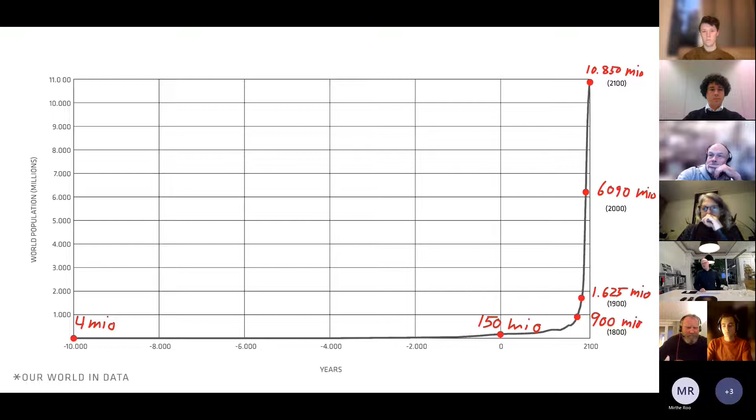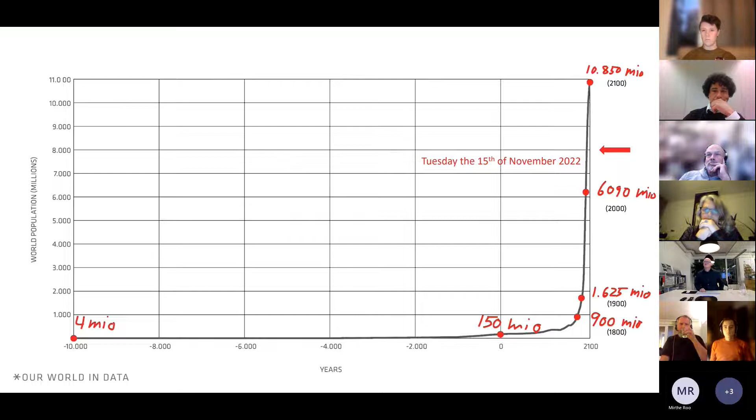And the reason for that is the human evolution that this first slide introduces. What is really shocking is this fact that just came up a couple of weeks ago, that Tuesday, the 15th of November, we exceeded 8 billion people on the planet. And it doesn't really look like this curve is going to incline less.

So we're basing our office and our approach on these conditions and the awareness that not everything looks like Denmark or the Netherlands, even though the two countries are some of the most cultivated countries on the globe, I think next to Bangladesh or something like that. But what is really mind-blowing is that over the next 40 years, we're going to more than double the amount of square meters that are already on the planet today. So to consider the consequences and effects that this situation generates is kind of mind-blowing to us.

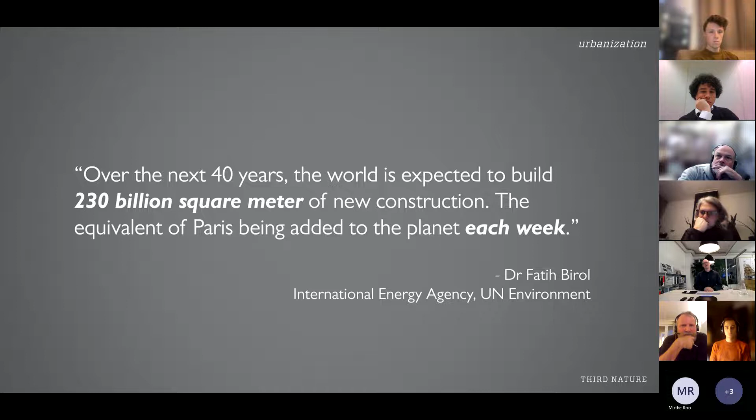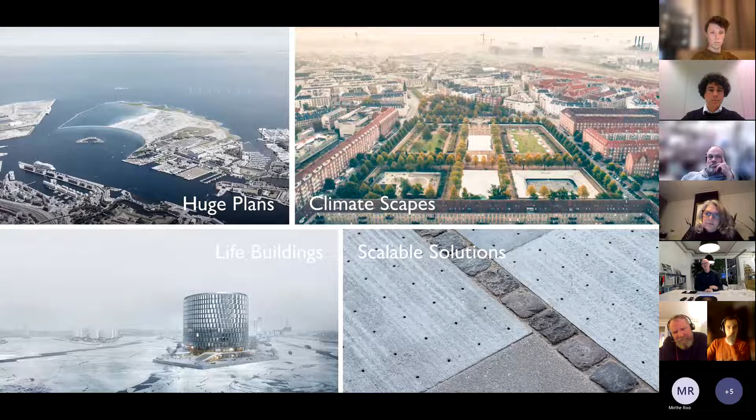So that is maybe a bit abstract, but that is what we worked with on different levels, going from huge plans to Climatescapes, the Enghaveparken that Hedwig just mentioned. We are also doing architecture, building quite a lot, actually. And then down to the smallest department, our scalable solutions, where this reference is a product we have developed over the past 5 years. I'll also introduce you to that. But let's jump right into the projects.

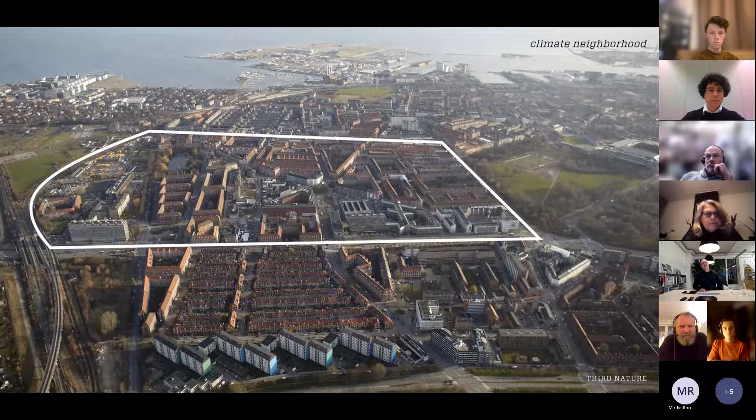The first project we ever did was a competition, part of the European planning competition called Europan. We chose this site just north of Copenhagen Center because we could bike to it and investigate it. Quite nice, of course. What was not so nice was that this 100-acre site, just after we handed in, was hit by a super rain event, a monster rain, a cloudburst. It's estimated to be equivalent to a 1,000-year rain event, causing damages in Copenhagen alone of more than 1 billion euros within a 2-hour rain incident.

This picture was actually taken from that site, and luckily we developed our proposal with a very nature-based approach. So we had quite a good gut feeling that we had a decent chance of winning, and luckily we did, and got the commission by the city of Copenhagen to develop the plan further.

And when we started working on it, we sort of came to the awareness that even though the streets and the heights of the buildings and the widths of the streets were more or less equivalent to any other neighborhood in Copenhagen, we were puzzled why there was a need to start painting white stripes all over the place to know whether you were supposed to stop or turn left or right. So kind of in a naive way, we started questioning, hey, could there be an abundance of pavement or closed asphalt here that we didn't need?

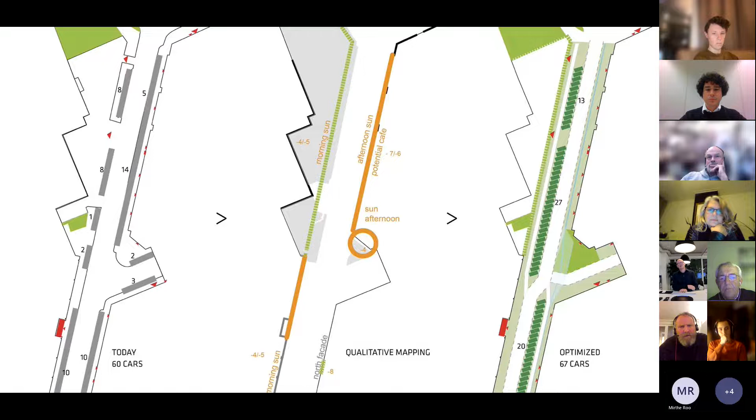So when we scaled it up on a 100-acre site, like this diagrammatic plan, as you see, there was more than 270,000 square meters of asphalt, and we could give 50,000 square meters back to the people living there, or the housing unions that are living there, as a shared outdoor space.

So all the southern or southwestern or western orientated edge zones outside the building plot, we could give back as green permeable areas that could transform the area from this grayish neighborhood into a much more lush green district that we then called the climate neighborhood. And that is what everyone calls it today. And it has been adopted as a pilot project to initiate more projects like this all over the city.

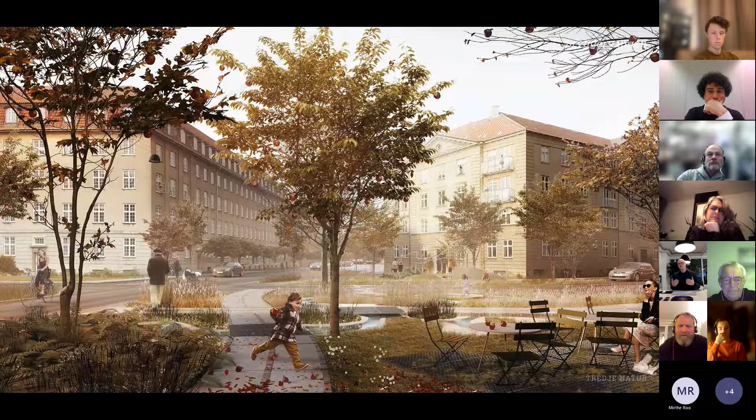So very often when we as architects are met with our illustrations and visualizations, they always say that that is not possible. But here we actually knew exactly what was going on also below ground. And I think in most European cities, we have tons of utility companies with the sewer system, the heating system, all the fiber cabling to lay out. At least in Copenhagen, we have, I think, 22 different utility companies.

And that's where the Tower of Babel comes in again, because they don't communicate. They don't share software. They don't share timing, meaning every time the utility company for the heating digs up the street and fits in new piping, 6 months later, another utility company is coming in, digging up the same pavement, the same tiles, and reestablishing everything. So it's a super expensive and kind of stupid way to do it.

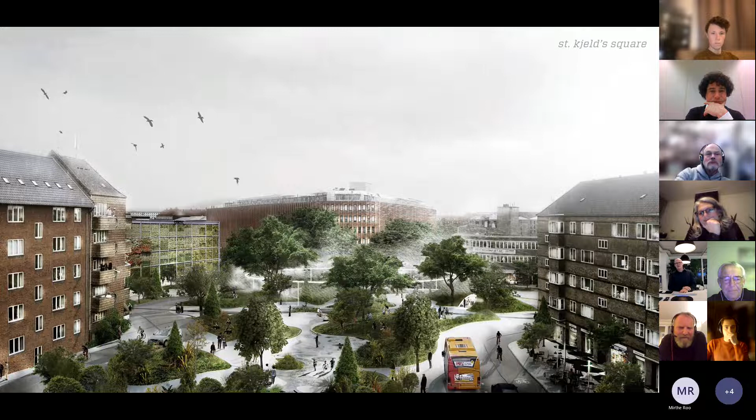So it was strong starting out with the why here again, and then creating the solution in the architecture itself. Again, turning an island of stupidity into an island of good behavior, into this kind of green scenario. And this is how the area looks today.

After we did the planning, the municipality developed three of the squares and the streets, and this square alone was optimized by more than 50% of the asphalt, turning that into green infrastructure. So again, a completely new mindset, a completely new view. You can actually hear birds sing. There are tons of different species.

It is climate protected, and this district is going from something that you took a shortcut through when you had to go to IKEA. Now you actually use it as a destination. Cafes are opening. The real estate prices are getting higher, also compared to the remaining parts of Copenhagen, like it's getting higher by 6 to 8% on a yearly basis. So kind of a success.

So we were saying to the city, like, listen, guys, if we could make this happen in this representative neighborhood of Copenhagen of a scale of 100 acres, what stops us in implementing that on a city scale in Copenhagen? So imagine if we could project the 20% cost saving on the servicing of our gray infrastructure and putting that into investing in the green infrastructure, making the city much more permeable, lowering the urban heat island effect, etc.

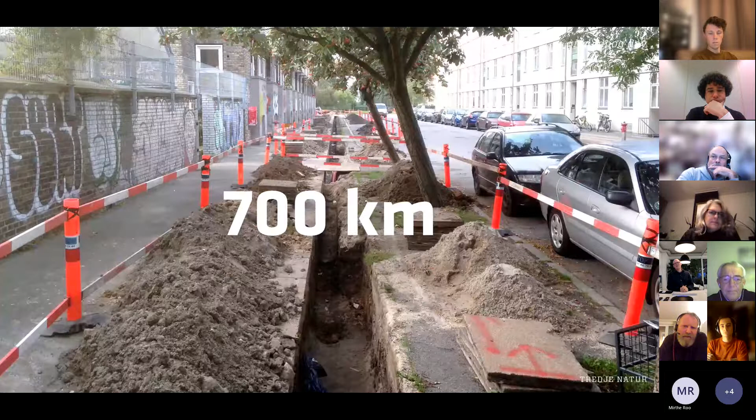The next project is actually a product called the Climate Tile, because we found out with all these optimization potentials of the gray infrastructure that there was this situation, as mentioned, that we have more than 700 kilometers of sidewalks in Copenhagen. They all consist of these gray tiles that you see in the lower right corner.

And this is the situation that you, as a commuter or a car owner, pedaling around, commuting, trying to find a parking spot, being frustrated because half of the city is looking like this all the time. And it also represents a lot of carbon emissions, pollution, etc. I guess you know all these issues. So we're saying, could we do that a bit smarter? Could we reinvent that tile that hasn't been innovated in the past 50 years?

So the ambition was to see whether we could take something that is kind of linear, our paving systems and our sewer system, and redirect them into a circular kind of thinking. If we could retain water falling on our roofs, on our sidewalks, that is considered clean enough to reuse, could we direct that into the planters, watering the trees?

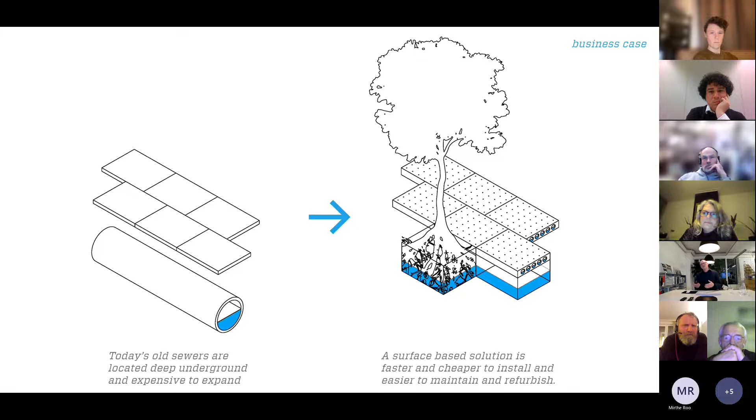Because I guess Copenhagen is not the only city that has a political ambition of planting hundreds or thousands of trees, but no one knows where to put them because we have this technological Tower of Babel below ground. So that was the ambition, and you see the conventional tile in the bottom and the new tiles, the climate tiles, adjacent to it. So the idea was to come up with a system that clicks directly into this scalable tile solution that we have all over the city.

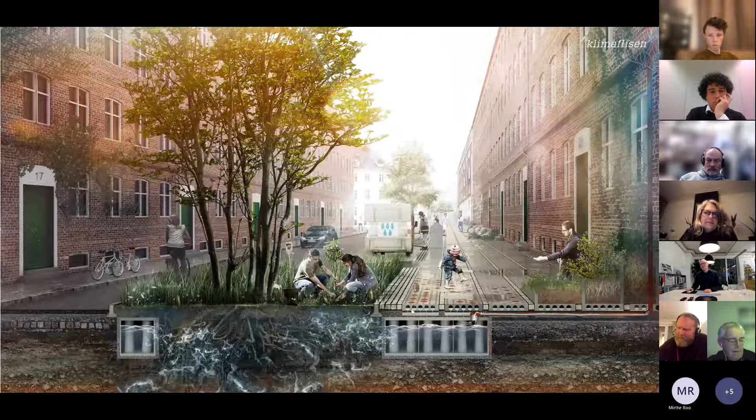But due to the fact that it has 42 holes on the top and a 5-chamber canal system in the middle of it, we could retain water falling on our roofs and sidewalks and store it until the existing sewer system is ready to receive the enormous amounts of water falling on our cities again. We could also direct it into the new planters that we proposed. We could also filtrate the water falling from the street before it went into the sewer system.

So kind of smart, stupid solutions that were more or less inspired by the Romans with the aqueduct. Here we just created something that was also scalable, but imagine coming to Copenhagen and being able to walk on water. I think that at least is a narrative that most politicians can understand.

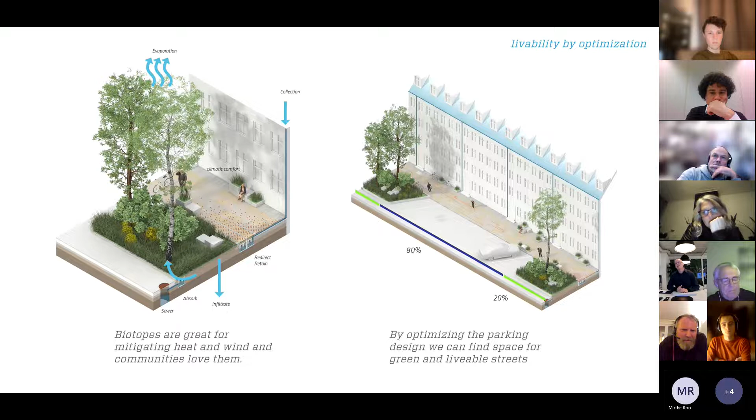The findings and the surpluses, the winnings of this project are, of course, that we can retain water, but it can also infiltrate, it can absorb, and it can also lower the urban heat island effect. We could also place trees and optimize the usage of the grey infrastructure, still fitting in a lot of cars and turning the streets as we know them into something that was much more inviting.

So the system actually comes in many different layers, spanning from a walkable sidewalk tile up to what we call a fat boy, being able to also provide solutions for streets, for bike lanes, etc. Again, it has to fit with the Danish standards.

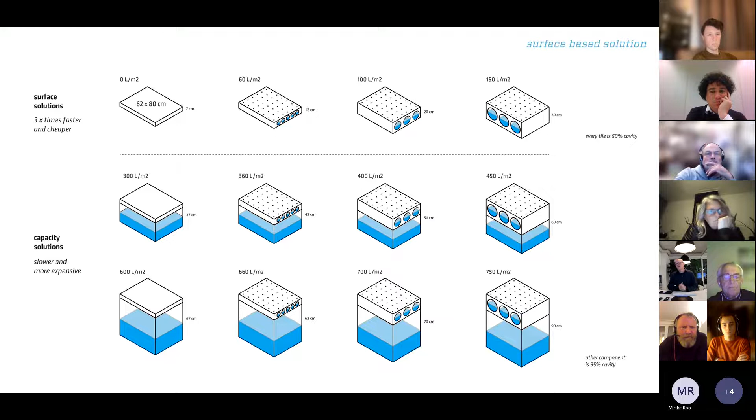We can dimension it in both lengths and widths and depths. So kind of a very modular, scalable solution. So for the remaining amount of money that we had in the project, we sort of said it's needed to test this out in the real world.

So we convinced this cafe and this housing block just outside the office that we could use them as a test. And this is how it used to look. And this is like half an hour before the last tree was planted and the last tile was put in place. And this was sort of the day after, and our collaborators from huge German cement producers came up to visit this test street.

But what actually catches my eye is that within a day, the street and the sidewalk turned from something that was just a walkway, a sidewalk, into an urban space. Suddenly, the area attracted a whole lot of different groups, and people started using it as a common space, as an urban space, where all the soft commuters, but also the cars, were sort of accepted because the nature-based solution functioned as this kind of a buffer in between.

And the nice side effect for us was that every time we visited the cafe, we got free coffee, because they more than doubled the income based on this urban space that was made sort of by mistake, more or less. So we have been monitoring the solution for the past 4 years.

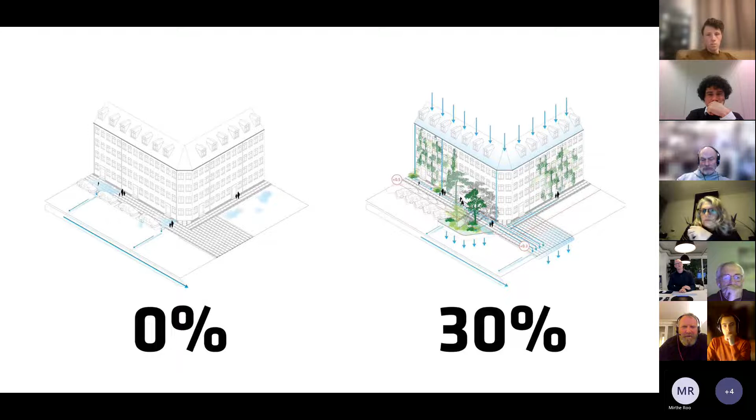So kind of a huge potential with a small product and a small solution. As you see, only 50 meters done, but we are sort of ready to take the concept to market. Now we're looking out for collaborators, other cities, ideally in Europe, who are also facing a lot of these flooding situations, not only Copenhagen, I know. So it is more or less ready.

And since there's a geographical limitation to when it makes sense to transport concrete products, ideally it's a system that we sort of license out. So local manufacturers, local producers can use it with the local concrete tile manufacturers in any given place. So hopefully going from 50 meters in Copenhagen to, I don't know what, in a city near you, hopefully.

So as said, this kind of approach led to other commissions for the city of Copenhagen. Actually, this was 7 commissions because there was a huge plan. After this rain event, the municipality initiated, I think, 300 projects over the coming years, for more than 2 billion euros. Our job was sort of trying to navigate within that, because there's a lot of knowledge, a lot of different disciplines that go into urban planning and climate resiliency. I think you all know that with the kind of topic we're discussing today.

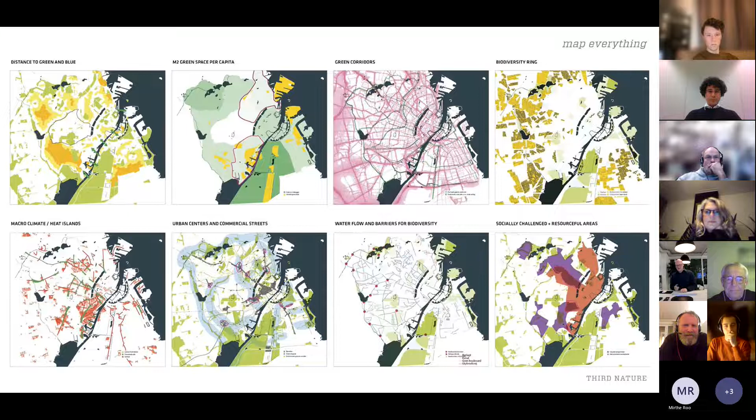So we looked into all these other parameters when it comes to urban planning and common sense. So what is the distance to green and blue? Where are the development zones? Where are the ghettos where you have earmarked a lot of money? Where are the heat island effects? And so I think 22 different parameters we put into this absurd Rorschach test of an urban map. And it looks like this hippie T-shirt from the 70s, I guess.

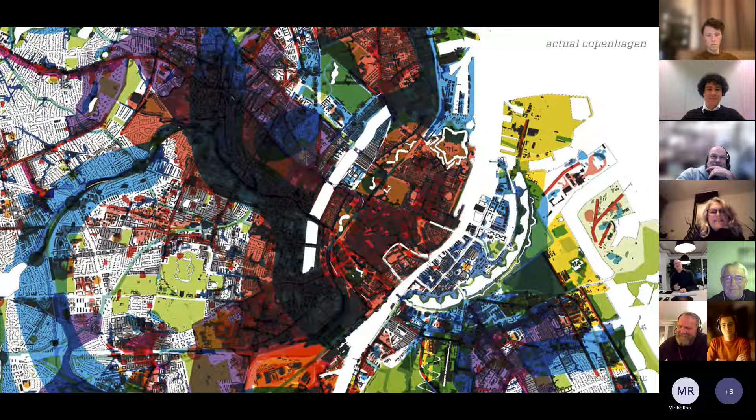But we sort of used it as a tool, because when we just pulled apart the 7 different districts, it was quite clear to see that there are different conditions here. Clearly in the inner city, the biggest challenge is the urban heat island effect, because we don't have the amount of green parks, etc., that can absorb the heat.

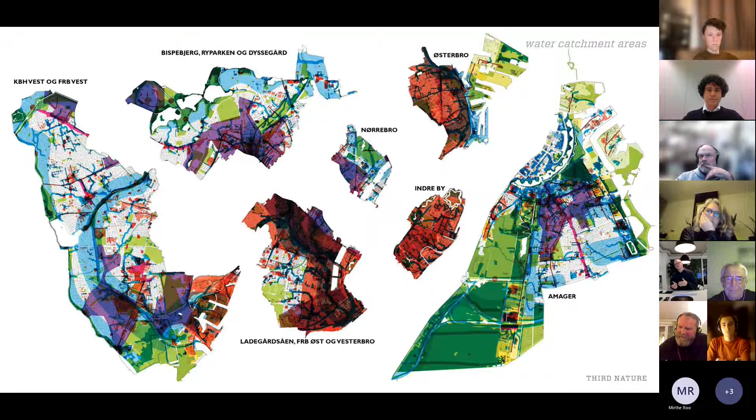So the best thing to spend your money on here is not the same thing that is smart to use on Nørrebro, where the office is, for instance. So on a very macro level, we recommended the city to use it as a guiding tool to actually direct the money in a smart way. So it's not one solution fits all. And then we came up with all these 7 different schemes for each neighborhood with clear recommendations.

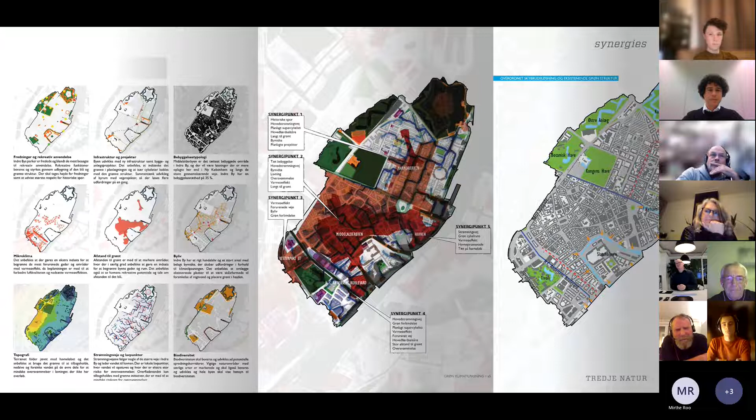What are the givens here? What is the parking norm? Where's the urban life? Where are the local flows, the blue spots? All these things with the topography. And then we created these recommendations of how to increase the amount of green based on that kind of knowledge. And then also with kind of basic solutions of how to create more connected green infrastructures.

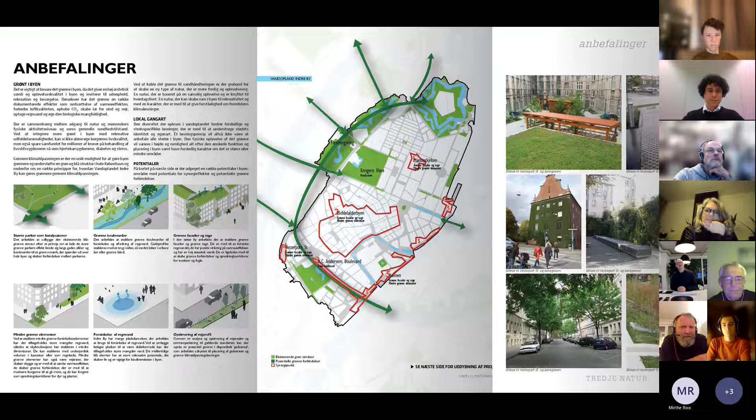Again, with reference to this quote, that we don't need islands of good behavior in a sea of stupidity. We need things that actually increase the biomass. We need things that can create synergies and connections of blue and green infrastructures. And the reason for doing that is also somehow in a curious way starting to question how can it be that we went from this

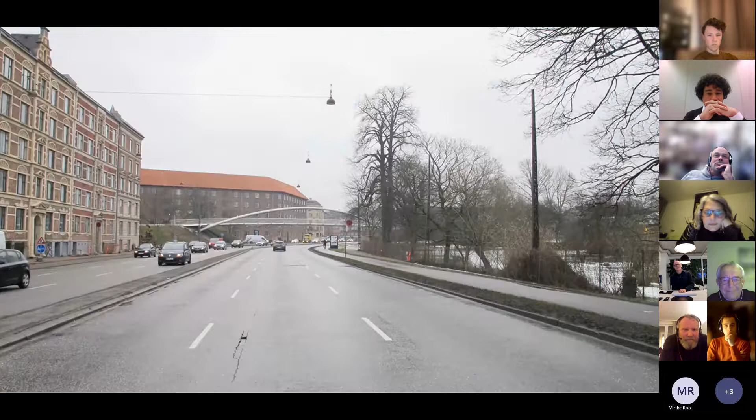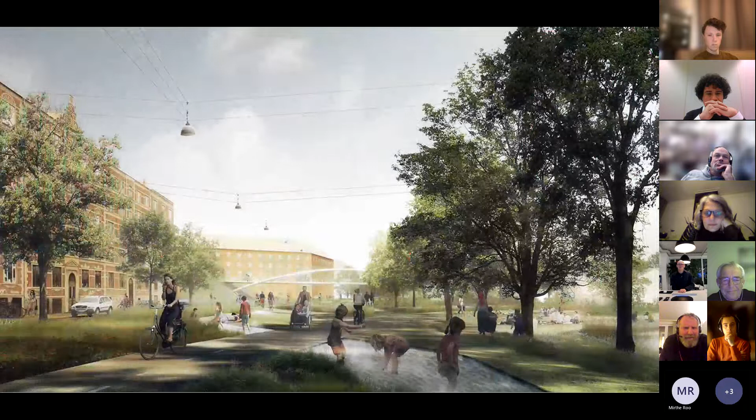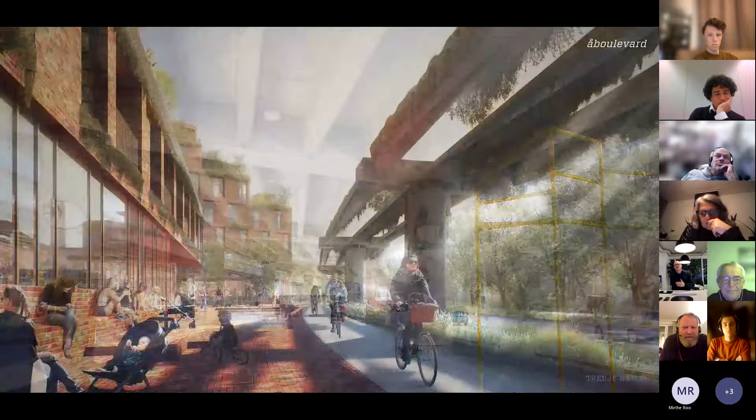So this is one of the main infrastructures in Copenhagen. So we created these kind of potential green visions that could show how the city would look if we actually could optimize the infrastructure, both above the ground, but also working with cut and cover solutions, climate adapted for heavy rain events. How can we look at this modernistic legacy that was initiated in the 70s? How could we turn that into the green line of Copenhagen, providing space for common housing, social housing, youth housing, etc. So as you see on many different levels, but hopefully you can also see some kind of thin red line in the narrative of how we approach our projects.

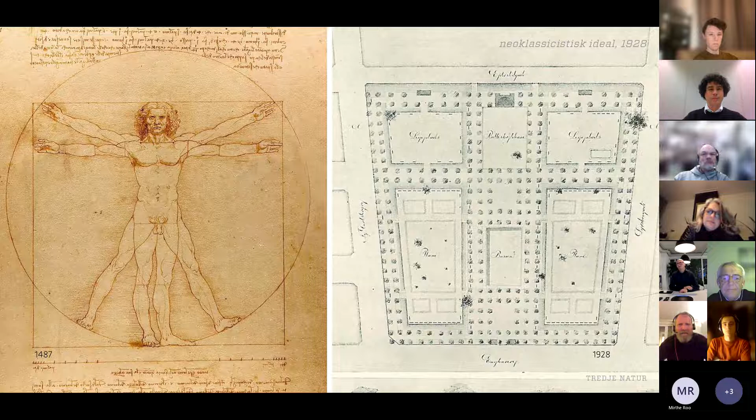And luckily that also led us to get invited and pre-qualified for a competition about this park, Enghaveparken, that is a wonderful place, or at least it was. Initially established back in 1928, based on this neoclassical layout with the Vitruvian man. Everything was related to the scale of the body, so kind of strict. The park was super popular, but also quite worn down, as you see from this overview.

But really an issue here was that the former brewery site of Carlsberg is just on the left side of this picture. And it was planned at a time where no one was even capable of spelling climate change. So all the water that is falling on this Carlsberg, the mountain, flows directly into the basements of this district. So the utility company of Copenhagen and the city came up with a given here that, yes, you have to renew the park, but you also have to fit in up to 24,000 cubic meters of rainwater in this park with a size of approximately 30,000 square meters.

So a substantial amount of water at a height that is, of course, giving some challenges to keeping the neoclassical layout. But we managed to come up with a solution, a three-step solution, as we call it, that works on a normal day, as you see on the left, where you have some water elements always visible, so the small puddles, the pools, and also a visible water element surrounding the park. On a 10-year rain event, we were then capable of retaining a substantial amount of water, as you see here, up to 10,000 cubic meters.

And retain it before the existing dimensioned utility or sewer system was ready to receive that amount of water. So again, the park functions as a reservoir and can hold back the water, minimizing the need to spend billions of euros on the infrastructure below ground that doesn't really bring any added value

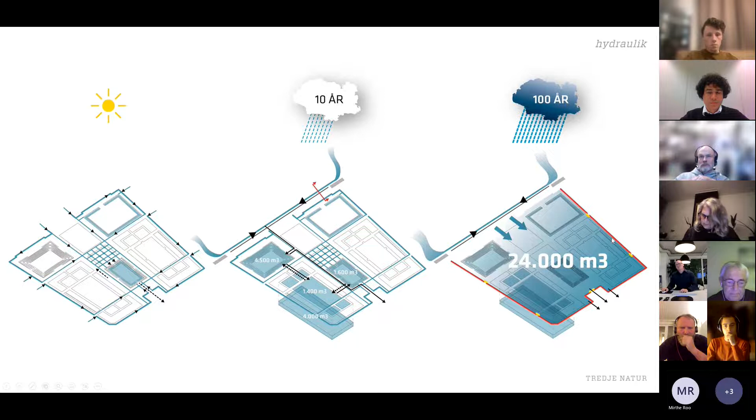to the city. And then on a monster rain event, a heavy rain event, the entire park can sort of be closed down by a surrounding dike, or the longest bench of Copenhagen, as we call it, an approximately 90 centimeter high dike or polder or bench that we can close down in these yellow marked entrances and then retain up to these 24,000 cubic meters of water.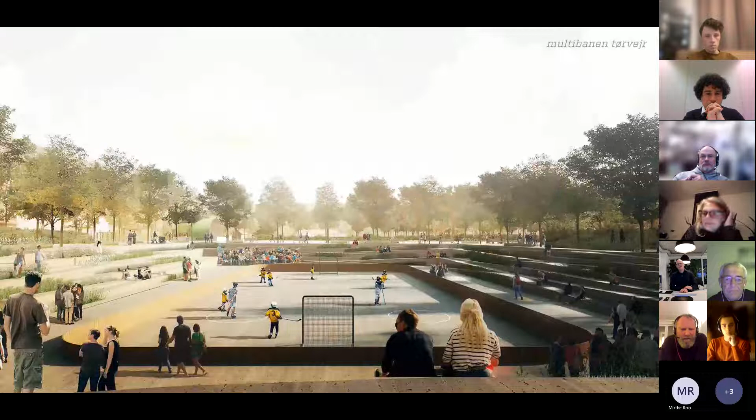So, of course, it doesn't rain that much in Copenhagen. It rains 180 days a year, so kind of a lot. But of course, the park has to work all the other days that it's not needed for these retaining principles. So it has all these elements. But jumping to one of these reservoirs, 99% of the time it works as a schoolyard, for the hockey club, for concerts, etc.

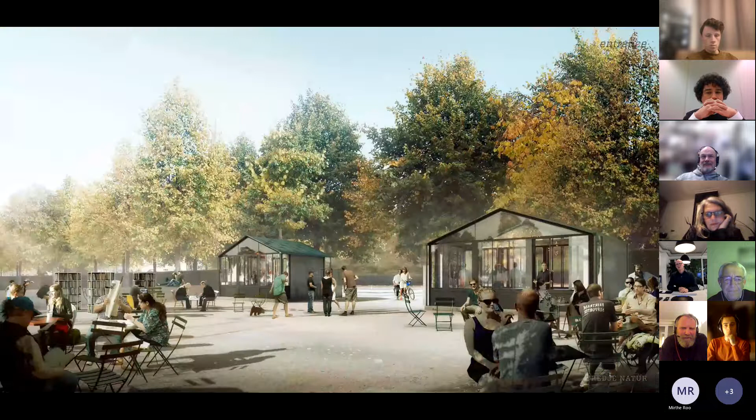And then when this 10-year rain event comes, the reservoir is being filled up, and you can retain the water until the sewer system is ready, and then it's slowly being emptied and cleaned, and 6 hours later, it's back to normal condition again. And on these super rain events, we can use the gates with the historical entrance buildings,

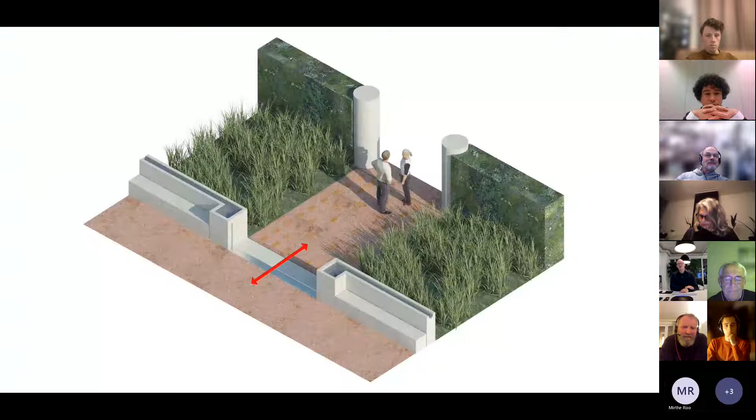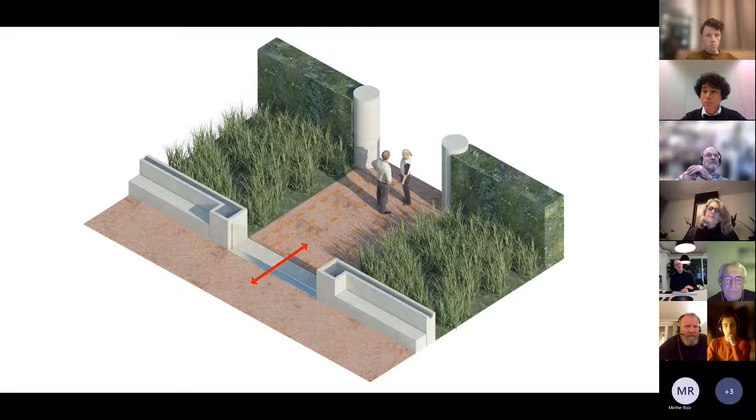and we sort of developed this idea of the gates where you see the benches here, and in a very low technical way, the weight of the water is being, what do you call it, detected, and then the gate is sort of with this dock port being closed off, and then it can retain all the water that is filled up to the max capacity.

And then seen, again, in a normal situation with this bench surrounding it, and then filled up with me sitting in this kayak celebrating a man-made natural phenomenon in a couple of years' time. The park was opened in 2019. It has been a huge success. I think there's more than 1 million visitors yearly, so exceeding the amount of visitors to the biggest and oldest amusement park in Copenhagen called Tivoli, which is far bigger than this.

So again, showing that there is actually a way for architects to come up with solutions. It's perhaps quite a technical solution, but it's the technical understanding here that actually informs the architecture and also understands the context and the historical legacy. So I think the challenge is not so much planning for adapting new development areas. It's much more how we climate adapt the existing urban fabric where the challenges are.

But Hedwig, you were there, and I'm happy to hear that you were excited about it. We'd love to see whether we could sort of export these kinds of ideas. We don't have that many parks in Copenhagen, so we're sort of exceeding our portfolio here. We're definitely looking out for more collaborations and more cities that are keen on seeing how we can implement ideas like this. But as you see from these pictures, it's super popular.

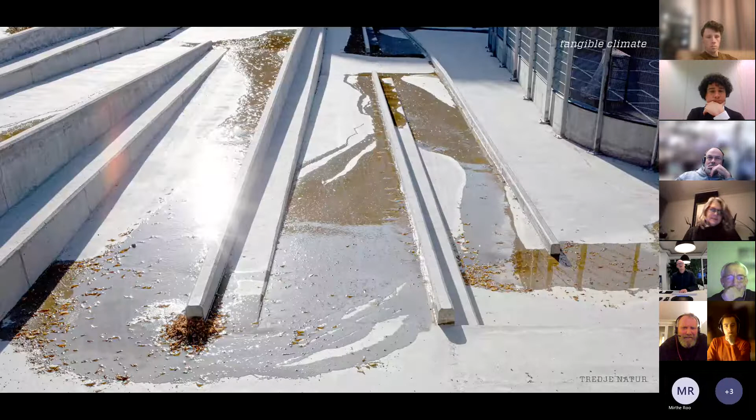The kids love it. We're still waiting for the huge rain event, but you always see water as an element here. It's not something that we hide. It's not water that we see as an issue or as a problem. We actually see it as something that we can bring back and create a bigger understanding on how we can climate adapt our cities with architecture.

Now jumping a bit to, I'll call it, the funny department. This is also not a realized project yet. I doubt that it ever will be, but we had a mayor from New York City coming to Copenhagen saying, "So ein Ding muss ich haben," in English. He was kind of inspired by our way of creating these systemic approaches.

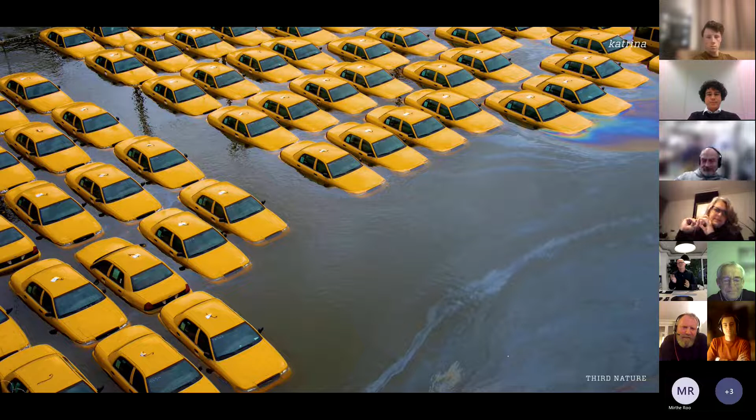And he said, we have these huge issues also with water, especially based on the catastrophes from Katrina. So can you come up with something that can bring ideas to the table where we can climate adapt? Can we come up with solutions that also handle more than one problem, for instance, the parking solution?

And very often you look into silos when it comes to urban planning. It's either a department at the city hall handling stormwater protection or rainwater protection, and another department handling infrastructure and parking. So we tried to insist that you had to, again, look into the synergies to actually create something that provided more solutions to the problem.

So we found out by analyzing all the blue spots of Lower Manhattan that there was this area at this roundabout to the tunnel below the Hudson River called St. John's Park, and it would fit perfectly to establish an underground parking facility of up to 300 parked cars. And again, here it's an island of good behavior and a sea of stupidity. It might be green, but it's not accessible at all.

So we said, can we look into something where we actually are creating two solutions in one? And I came in mind of this principle from like 5th year physics class, the principle of Archimedes. Imagine that the glass represents this underground solid concrete cylinder that retains all the water, and then the cork represents the parking structure with all the cars inside it, which simply pops with the water pressure. It's again the buoyancy of the submerged element that defines

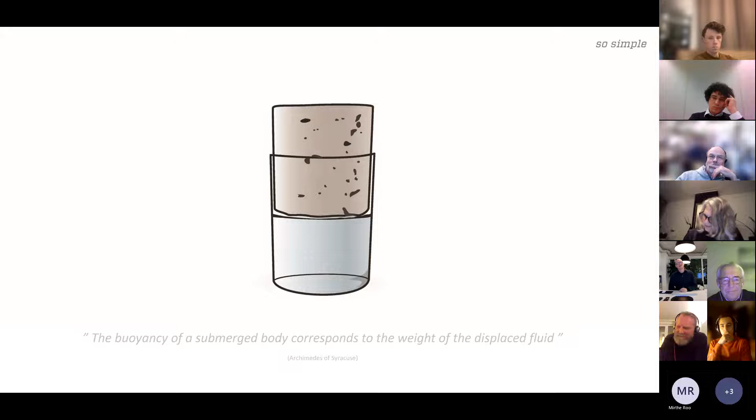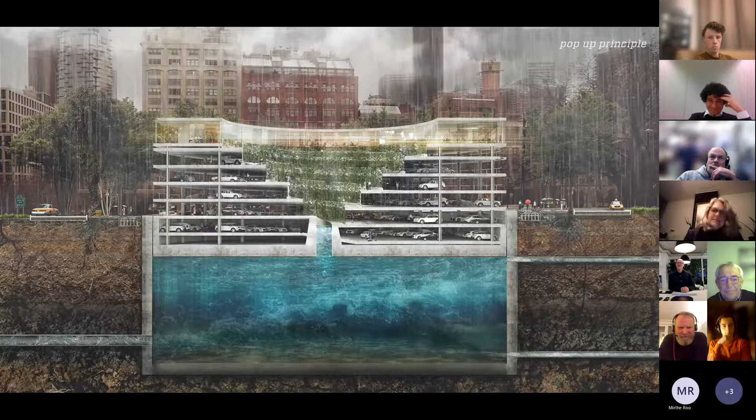why it floats. It sort of looks like this kind of utopian section, kind of dystopian section, some say. It is based on the same kind of principle. So it is in this local low where all the water comes in, and the pressure and the power of the water simply makes the parking structure float.

We developed the idea and the narrative, and then we approached the two biggest engineering companies of Denmark, called COWI and Ramboll, and they sort of made the business case. They calculated on the hydraulics, they calculated on the statics, and they were really annoyed that it was architects coming up with an engineering solution like this. But it is equivalent to the floating docks, or the sluice, the sluizen in the Netherlands with the big ships. You can simply empty it and you can fill it up, and the structure floats.

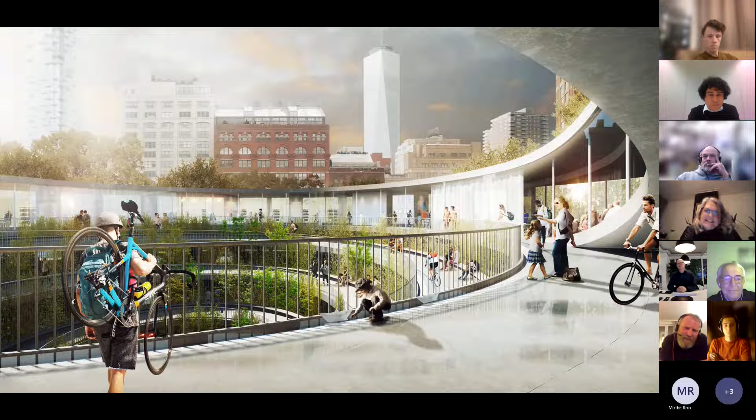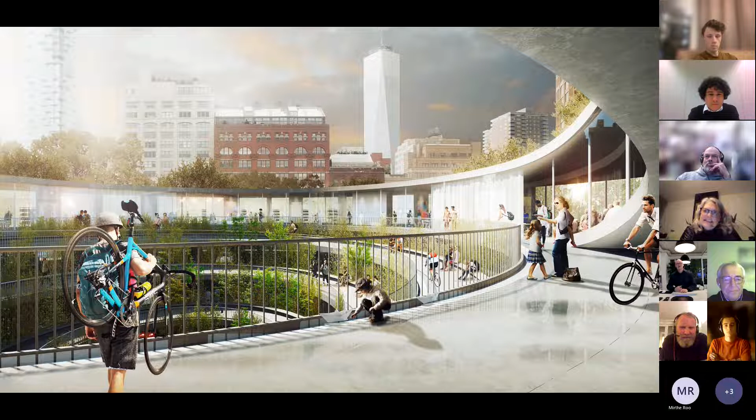Again, here we propose that it's a publicly accessible program. It could be a cafe, it could be a museum on top of it, with an accessible day-lit parking facility also for bikes. And it would look 99% of the time like this. And then when the next Katrina or the rain event comes, it starts to pop. And again, it has the capacity to accumulate up to, I think, 6.5 million gallons of water. I can't remember the amount of cubic meters, but you can do the math. And then, when the sewer system in New York is ready to receive the amounts of water, it goes down into normal condition again.

So the project is hanging on the wall of the office of this mayor in New York, and we're still waiting for the green light. I doubt that it will happen, but we were just approached by Audi in the Netherlands today, actually, asking for the illustration and the description, because they like innovative ideas for mobility, and I guess it fits well in this.

But we're also surprised by the popularity of the project, or how it actually managed to communicate. As you see, there's this Instagram account, and when we did this project some years ago, it had more than 12 million followers, and they were all interested in Rihanna and Drake and sneakers. And suddenly, the pop-up parking illustration popped up here and generated more than twice as many likes in a day compared to my old colleagues from BIG when they promoted their Lego House.

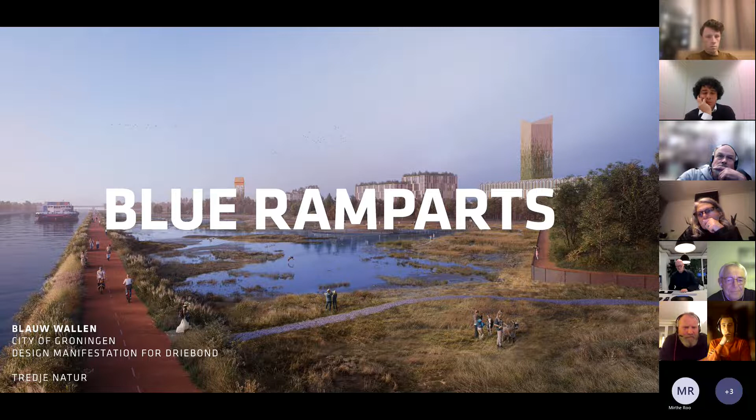Then jumping to the project where you, Hedvig, heard me present, we were so lucky to be invited to this initiative in Groningen at the time of this Spongeland exhibition. I think it managed to travel around some cities in the Netherlands. We were asked to come up with an idea looking into Groningen, not the medieval periphery of how Groningen looked with this fortified perimeter, but more based on the fact that Groningen is growing at a fast speed.

So you had to activate also the periphery of your district, of your region, and the city. Especially, we were asked to look at this industrial site called the Damsterdiep zone, that consists of a lot of car dealers and utility companies and industry.

But in the near future, like in 2025, it has to be part of the urban fabric. Also trying to deal with the urban heat island effect, as you can see, is expected to be increased by more than 2.5 degrees. And this is how it looks today. Again, I wouldn't even say it's an island of good behavior. It's an island of bad behavior and a sea of stupidity. But I think it's quite representative of any other European city as we know them.

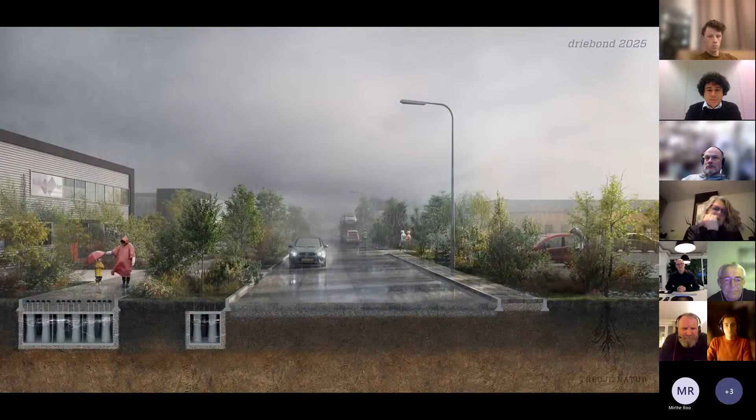So the question was, how can we come up with a solution and a strategy that gradually over the next 30 years could transform this into a different urban space, livable space, climate adapted space. So we, again, with all the projects I've been showing you, looked into how can we optimize the streets, how can we activate the green infrastructure, etc. And this is how it looks today. And here I think you can see some kind of best of the different projects I showed you with the climate tile, the street width optimization, the increase of biomass and biodiversity.

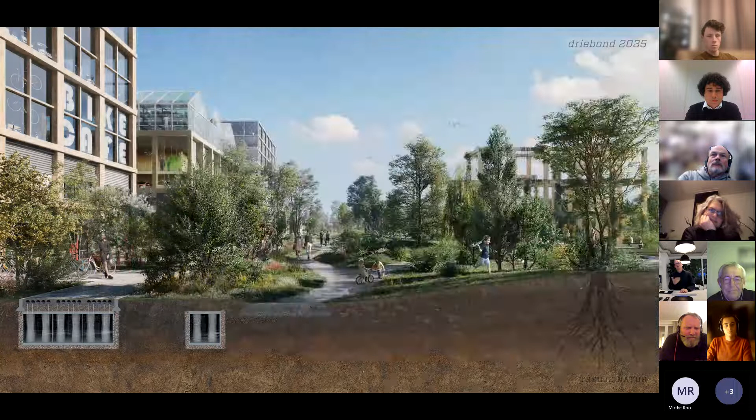So this is a scenario of what it could look like in a couple of years' time, really easy. All the industries could fully function as they do today, but you could slowly start the transition and the transformation of the identity of this district. And then with a fast forward, looking into the Driebond in 2035, the infrastructure has been completely replaced by mobility hubs, other ways of commuting. The functioning of the industries has been replaced by different, more green industries and institutions and housing, creating a much bigger connection of the green infrastructures.

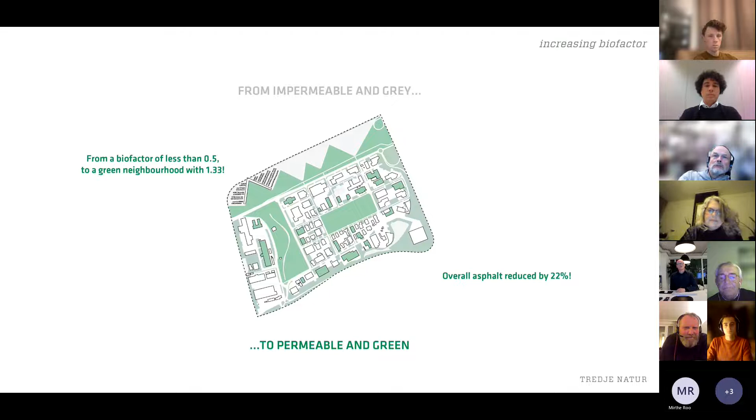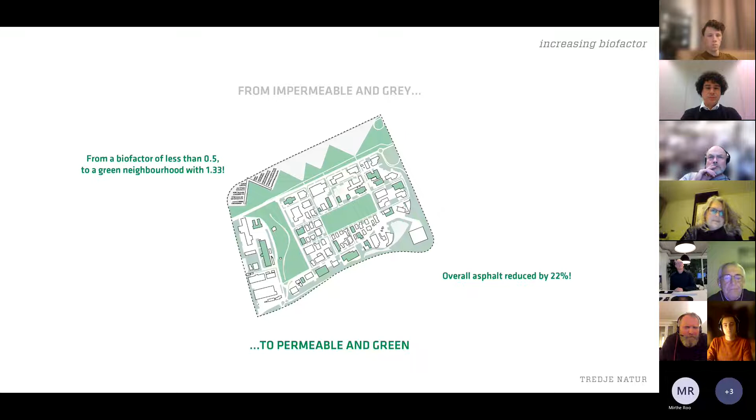So the findings that we defined here are maximizing the permeability, reducing the overall asphalt by 22%, so actually even more than what we managed to do in Copenhagen. We could go from a green biofactor of 0.5, that is not bad, but we could create a mind-blowing biofactor of 1.33. We could, by that, create a cool heat sink by providing all these green areas. It could really contribute in lowering the heat by a substantial amount of degrees.

Sorry, I just have to drink some water.

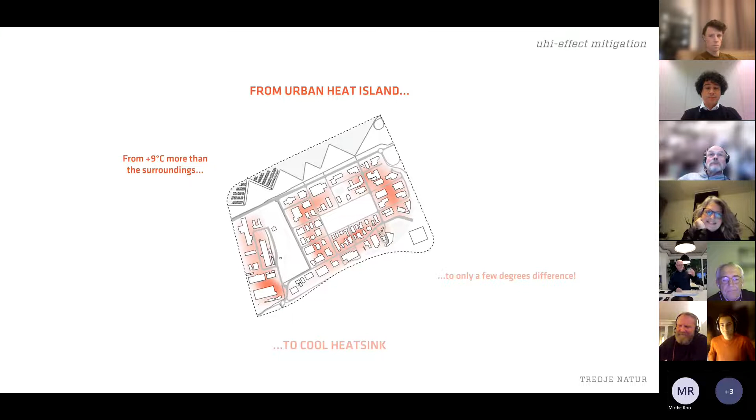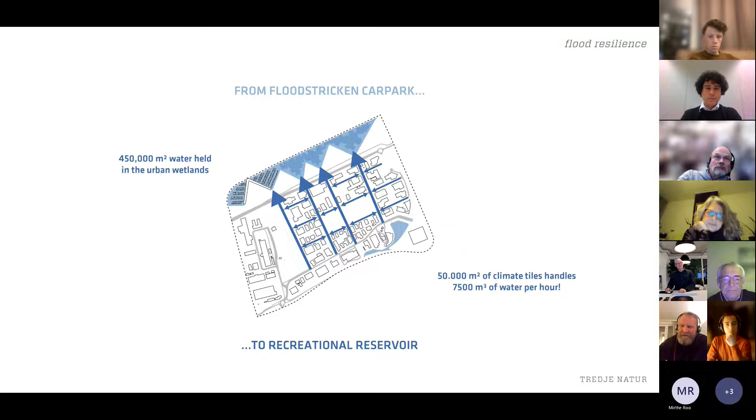Sorry. Talking too much. You okay? Yeah, I'm okay.

Sorry. No worries. And then creating some kind of scenarios like you see here in the picture. So that was about it.

My voice is gone a bit, but that was also, I think, exceeding a bit the 25 minutes. I hope you're still in there. I hope the Netherlands scored at least one goal, but I'm open for questions. Yeah, exactly. The game is not that exciting anymore, so we can have some questions. Yeah, you get some applause as well.

Yeah, that's great. You can go all over the place, from Copenhagen to New York, talk about whole cities, but also a tile, and especially the integral approach. So many disciplines that come down to it. That's amazing. Are there any questions from everybody? I saw everybody very attentive, listening. So, any remarks from you guys?

Or all amazed? Yeah, I'm curious because Piet, you also did something alike at the Grote Markt, where the water from the buildings is being infiltrated in the ground with plastic crates to hold it. Maybe you can tell something about it. Is it similar to what Ole showed us?